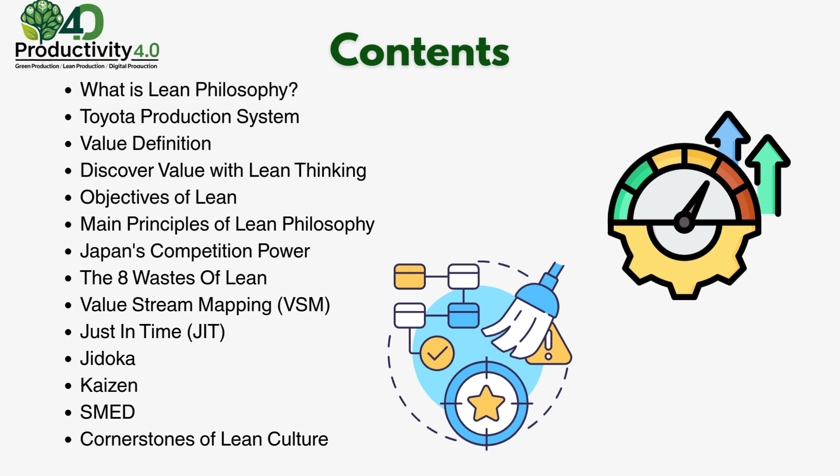In this presentation, we will provide information about lean transformation. In this content, we will explore the basic concepts of lean philosophy, the building blocks of the Toyota production system, and the lean value concept. Additionally, we will focus on the waste reduction, the continuous improvement culture, and the contributions of lean tools to businesses.

Lean philosophy is a mindset that aims to offer the highest value to the customer with the least amount of resources. This approach is based on eliminating waste and ensuring continuous improvement. Developed by Toyota in the 1950s, this system led to profound changes in manufacturing processes to increase efficiency. The key point is this: lean philosophy is customer-oriented, data-driven, and process-based. Decisions are shaped according to customer needs, and processes are constantly reviewed accordingly.

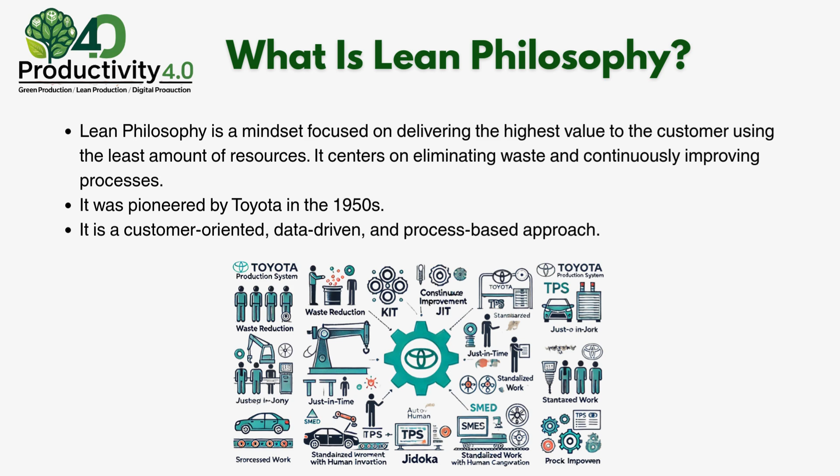Lean philosophy has two main principles: just-in-time and Jidoka. These principles form the core of the Toyota production system. The just-in-time principle aims to produce the required product in the required amount and just in time. By eliminating unnecessary stocks and waiting times, it ensures a smooth and efficient process. This allows for quick and accurate responses to customer demands.

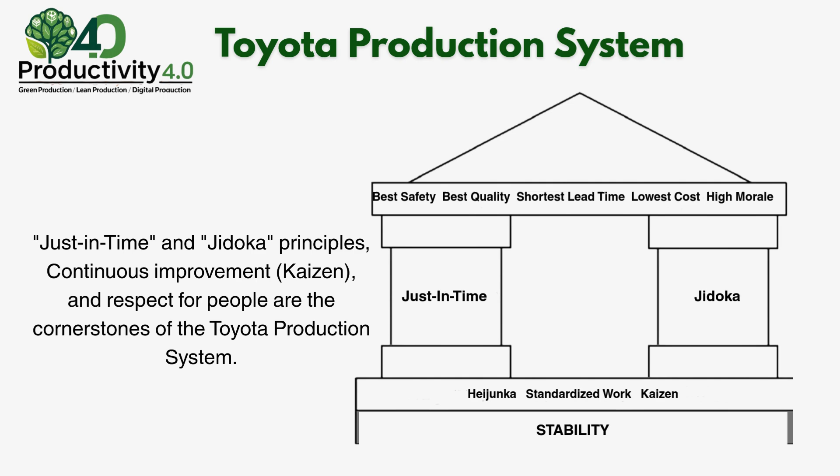Jidoka places quality within the process. It gives the authority to stop production when a problem occurs. This ensures that errors are detected before they develop and resolved immediately. It also refers to machines becoming intelligent while human control remains active at all times. When these two principles are combined with the principles of continuous improvement, Kaizen, and respect for people, they demonstrate the power of lean philosophy.

Value is everything that directly meets the customer's needs and, as a result, they are willing to pay for it. A product or service is considered valuable if it solves the customer's problem, meets their expectations, or provides benefits to them. If the customer says, yes, it's worth paying for, that process or output has genuinely created value.

Waste encompasses all activities that do not change the physical structure of the product, do not improve its quality, and are not something the customer is willing to pay for. These types of activities consume resources but do not create value. In contrast, value-added activities are those that change the physical structure of the product, improve its quality, and are processes the customer is willing to pay for. These activities provide direct contributions to the customer.

There are also activities that do not add value but are necessary for the process. These may not affect the quality or physical structure but may be essential for the continuity of processes in the existing system. However, the customer does not want to pay for these activities. Therefore, our goal is clear.

The main objective of lean thinking is creating value for the customer. Producing products or services that meet the real needs of the customer, provide benefits, and that they are willing to pay for is the starting point of the entire process. However, unnecessary steps in processes, i.e., waste, should also be eliminated. This means eliminating all activities that consume resources but do not add value, such as waiting, overproduction, and unnecessary movement.

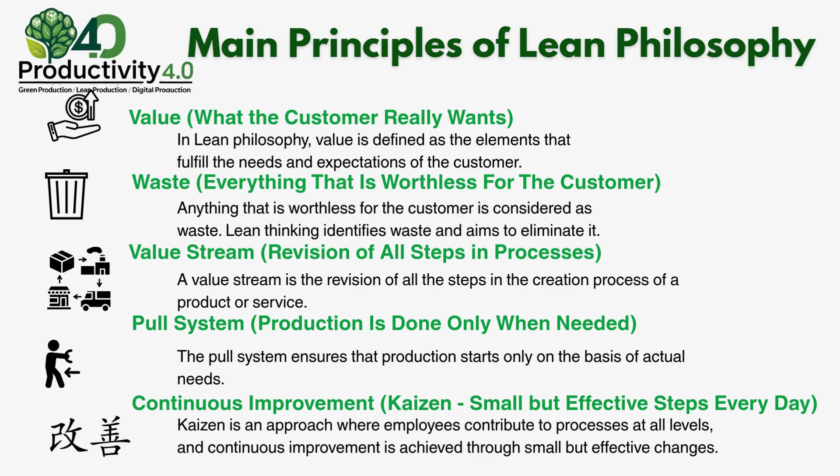The foundation of Japan's success in competition lies in the philosophy of maintaining and improving standards. This philosophy is based on the belief that work is futile if standards are not met. In other words, it is crucial to establish standards for processes to work smoothly and continuously improve those standards.

The Japanese management approach not only increases efficiency but also enhances employee participation and motivation. As employees stick to the standards, both individual and organizational success is achieved.

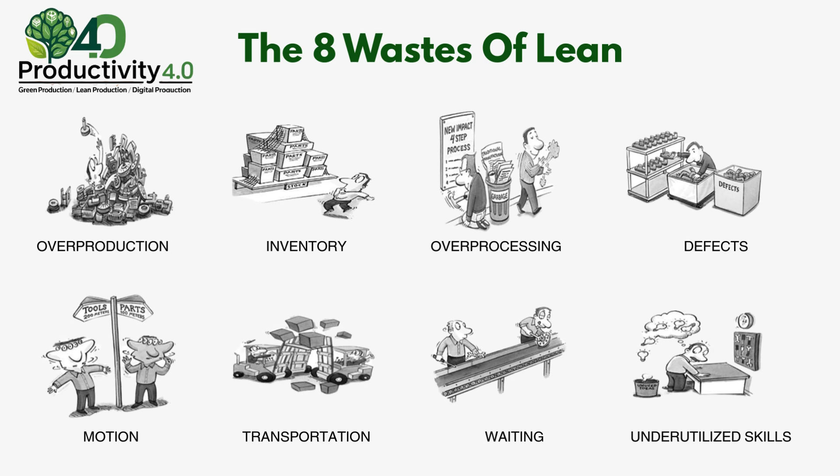According to lean philosophy, waste is anything that does not create value. Overproduction refers to production done beyond the required amount or ahead of the needed time, and leads to unnecessary costs. Inventory is the accumulation of excess stock, which increases transportation and storage costs. Overprocessing points to the existence of worthless steps and extends processes.

Defects require rework and lead to time loss. Motion results in labor waste, while transportation makes unnecessary movement of products. Waiting shows delays in processes, while underutilized skills indicate the failure to fully use employee potential. All these wastes decrease process efficiency and hinder efforts to create value.

Overproduction refers to producing more than what is needed or before it is actually needed. There are several key reasons for this. First, long adjustment times make large batch production attractive. Long durations can lead to more products being produced in an attempt to speed up the production process. Another reason is unbalanced workstations. Imbalances at workstations can lead to overproduction.

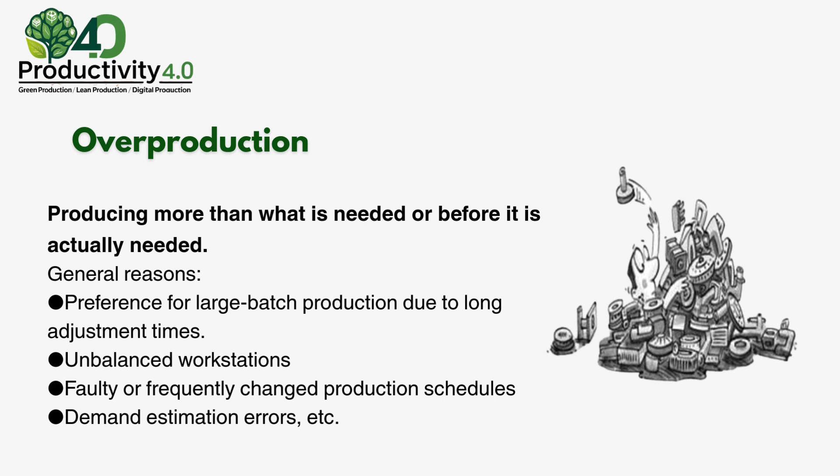Lastly, demand estimation errors can also result in overproduction. Incorrect forecasts increase production quantities, causing waste. Overproduction not only leads to resource waste but can also cause customer dissatisfaction.

Inventory refers to raw materials, intermediate products, or finished products held in excess of the amount required during the production and delivery processes. The main reasons for excess inventory include overproduction, producing more than the required amount, excessive purchasing due to supplier security concerns, and high minimum purchase order quantity.

Additionally, defective product recipes and inactive stock also increase the inventory waste. When inventory is excessive, it not only increases costs but also leads to the waste of additional resources such as storage space. Therefore, inventory management is an important factor that should be considered to increase efficiency.

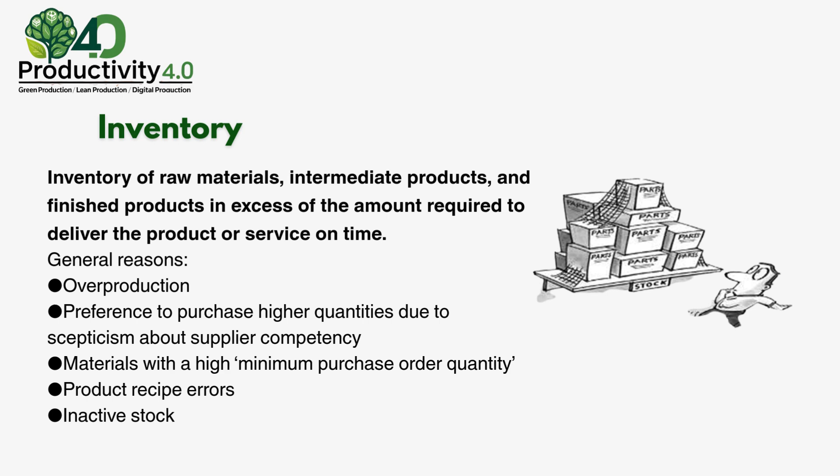Overprocessing refers to processes that are intended to create more value than what the customer needs. Eliminating such processes is a critical step to enhance efficiency. First, non-standardized tasks are among unnecessary processes. This may lead to unnecessary extension of processes due to the lack of clear definition of tasks.

Another example is painting of surfaces that are not visible or do not need protection. These actions do not add value to the customer and result in time waste. Finally, non-functional additions can also be considered unnecessary processes. These aesthetic elements do not increase the functionality of the product but complicate the production process and increase costs. Avoiding unnecessary processes, optimizing your processes, and improving efficiency provides huge opportunities in terms of both time and cost.

Defects refers to any product or service that does not meet the customer's needs. This not only negatively affects product quality but also customer satisfaction. There are many common causes of defective production. First, non-standardized processes lead to inconsistencies in products due to the lack of proper standardization in production processes.

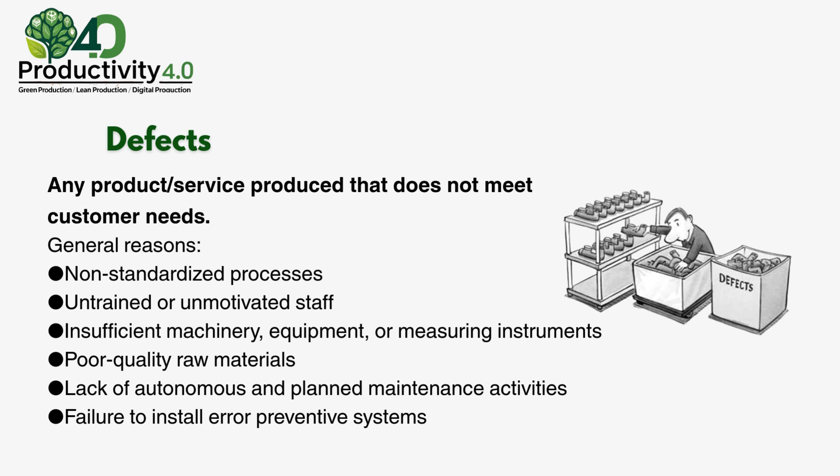Motion refers to actions of employees or machines that do not add value to the product or service. Such movements are a significant loss that directly affects efficiency and must be eliminated to make processes more efficient. The main causes of unnecessary movements include inefficient workstation or process design. If workstations or processes are not designed efficiently, employees are forced to make unnecessary movements.

Another cause is layout errors. If operators have to walk, reach, or bend too much, it leads to time loss. Finally, searching for equipment is also a significant time waster. When employees spend extra time looking for tools or equipment while doing work, it negatively affects productivity. Eliminating unnecessary movements will make processes more efficient and minimize time losses.

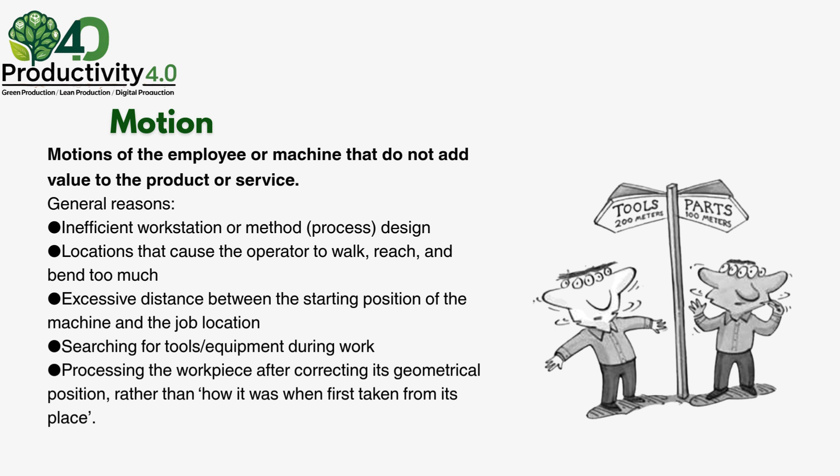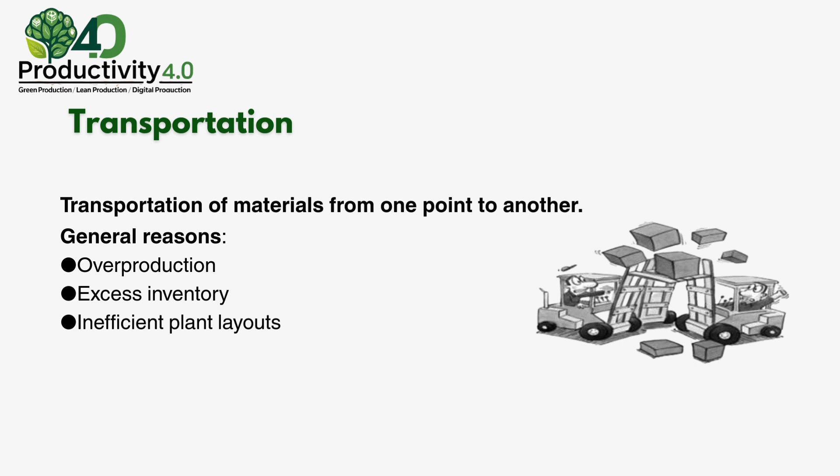Transportation refers to the transportation of materials from one point to another. This process is influenced by factors such as unnecessary transportation of products due to overproduction, the constant need for transportation due to high inventory levels, and the difficulty of transporting materials due to inefficient plant layout. These factors reduce the efficiency of the transportation process, leading to time losses.

Waiting refers to waiting for a step in the process to be completed, or working at a low speed, and can seriously impact our productivity. Common causes of waiting include coordination deficiencies, mismatches between operators and machines, unbalanced processes, and malfunctions. These factors prevent processes from operating efficiently.

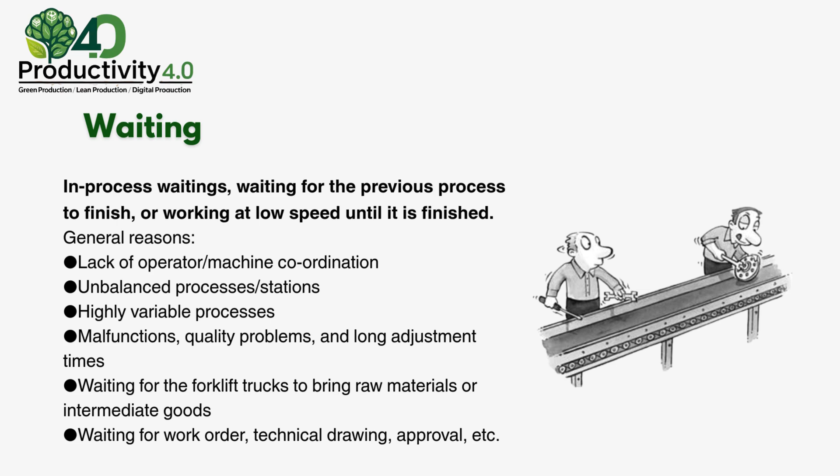The main objective of value stream mapping, VSM, is to reveal the value-added and non-value-added steps in the process. This mapping visualizes all steps from the beginning to the end of the process, including the time and information associated with each step. This makes it much easier to observe the process flow and identify improvement opportunities. Understanding which steps really add value at each stage of the process is crucial to making our business processes more efficient. Our goal is to clearly present this value stream and create a smoother process by eliminating unnecessary steps.

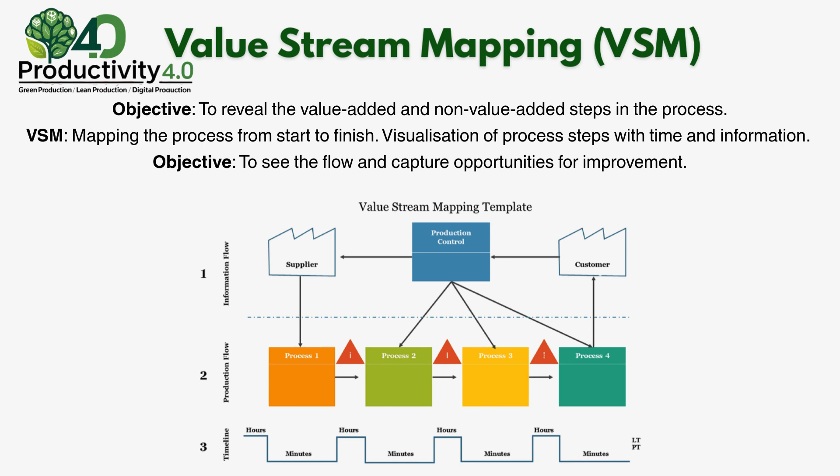Just-in-time, JIT, aims to produce only the needed amount and at the right time in the production process. This approach significantly reduces inventory costs by preventing overproduction and makes production processes more efficient. One of the basic principles of JIT is demand-driven production. That is, production takes place only based on customer demand, which eliminates unnecessary stock accumulation.

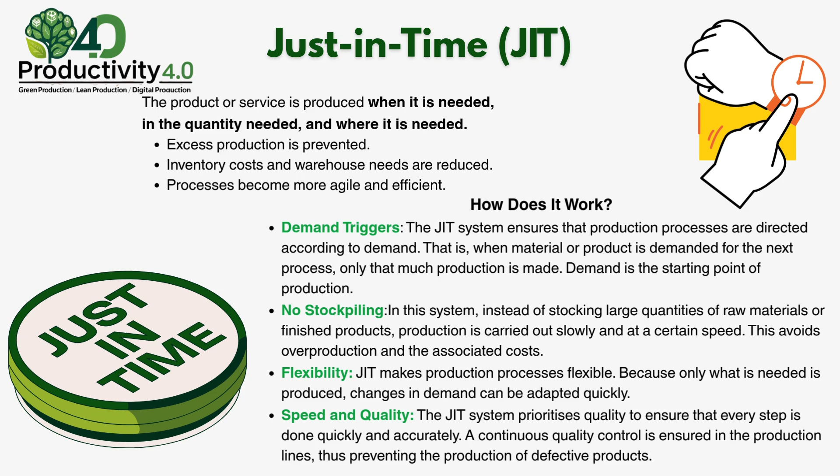In addition, the JIT system minimizes stock levels and ensures that production is carried out only when needed. This flexibility allows rapid adaptation to changes in demand. JIT also guarantees high quality at every stage by minimizing errors in processes through continuous quality control.

Jidoka is a system based on early detection of failures during production and on the prevention of further production until these defects are resolved. The main purpose of this approach is to detect mistakes on the first occurrence and resolve them with early intervention. In this way, potential disruptions in the production process are minimized.

For Jidoka to be effectively implemented, every employee must perform quality checks at each step and report any abnormalities in the process immediately. This approach not only ensures defect detection but also provides an opportunity to solve them. Implementing the Jidoka principle increases productivity on the production line while also prioritizing quality.

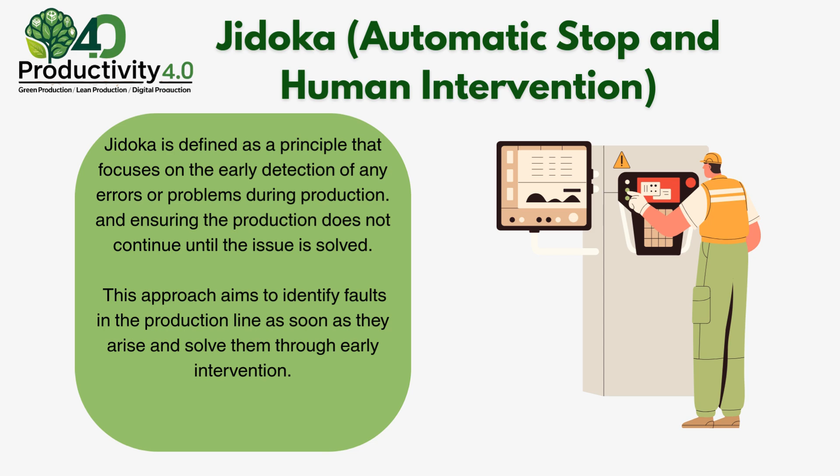Kaizen is a Japanese term that means continuous change for the better. Its core philosophy is to achieve improvement through small but continuous changes. In this approach, each small step is seen as an opportunity to make a big difference. When we look at the benefits of Kaizen, we can see that continuous improvement stands out as a top priority. With small but consistent improvements, our processes can become more efficient, faster, and of higher quality.

Another important benefit of Kaizen is employee involvement. As employees are included in the improvement process, their motivation increases, and their commitment to the organization strengthens. Finally, Kaizen helps reduce costs over time by increasing productivity. It not only improves processes but also helps build an innovative and adaptive organizational culture. This philosophy values the contribution of every employee at all levels and encourages the involvement of each individual in the process.

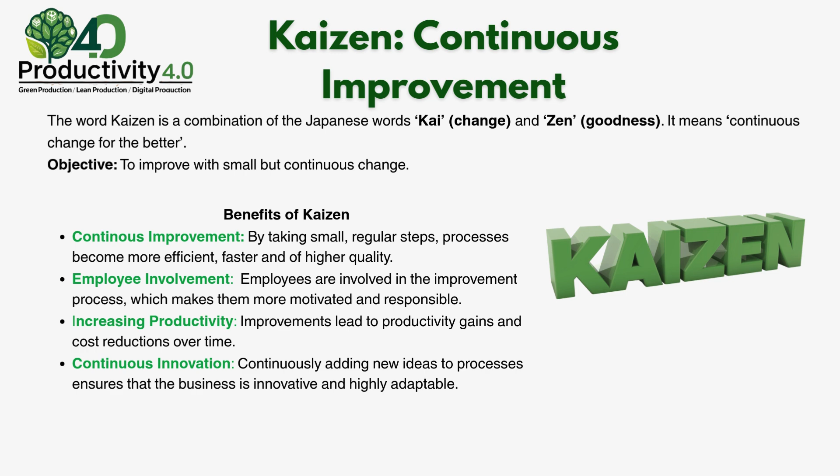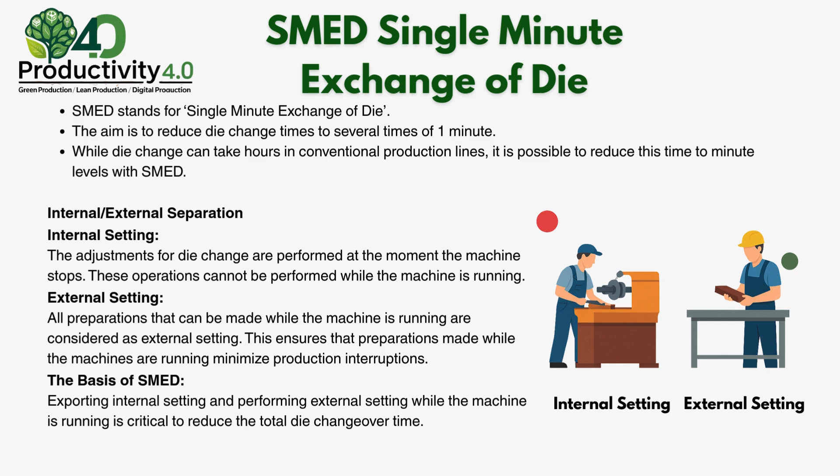The core idea of SMED is to export internal setting and perform external ones while machines are running. In doing so, we increase efficiency by reducing our total die change time. Additionally, this method enables our employees to take a more active role in the process. Each employee is the owner of the process, not part of it. Improvement is everyone's job, not just managers'. Participation fosters a strong sense of responsibility at every level of the process, which enhances the success of the organization.

Problems are exposed, not hidden. At this point, making problems visible is a critical step. Transparency and visualization tools, such as Andon boards, support this process. Immediate visibility of problems helps us find quick solutions.

Finally, on-site observation is very important. The most effective way to access real information is for leaders to observe the processes firsthand. This method allows leaders to better understand the process and resolve emerging problems quickly. In lean culture, each of these keystones is crucial for continuous development and improvement.